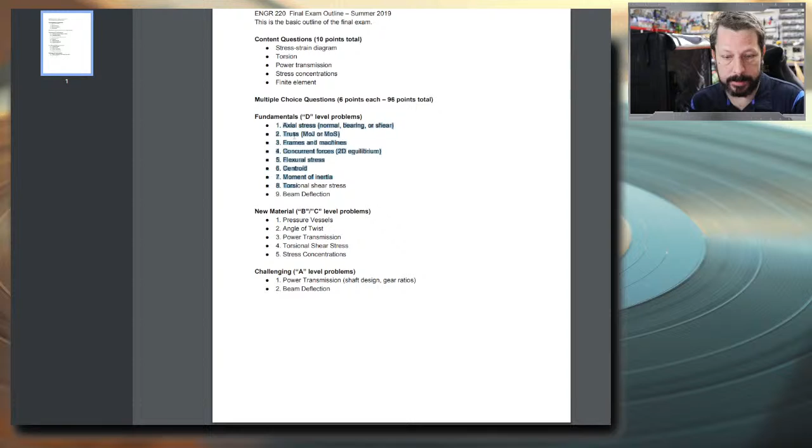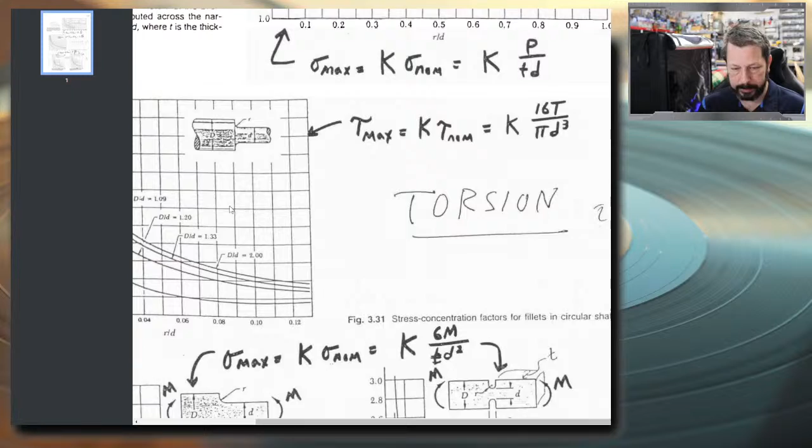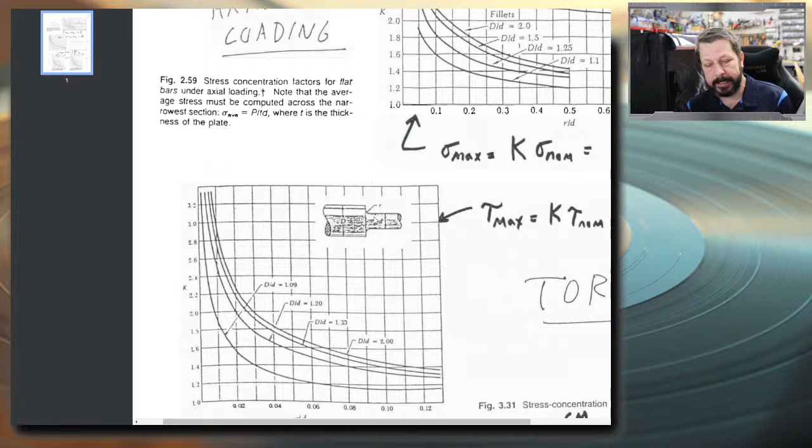Here's one - this is torsion, a shaft with a step on it. We talked about this before, where there's often a need for a shoulder on a shaft so a gear or bearing can ride against it, or maybe you just don't need the strength at that point any longer, so it's a smaller diameter. But there's a change in geometry. Anywhere there's a change in geometry like that, you'll have what's called a stress riser, meaning an increased amount of stress at that transition zone between the larger and smaller areas.

This chart is used to help calculate that increased stress. It's a multiplier - this value K on the y-axis is really small, but K is how much you would multiply the average stress by. In this case, TC over J, you would multiply it by some number ranging from apparently 1 to 3.2 on our graph. At this location where the geometry changes from big to little, there would be that many times the stress - that much greater.

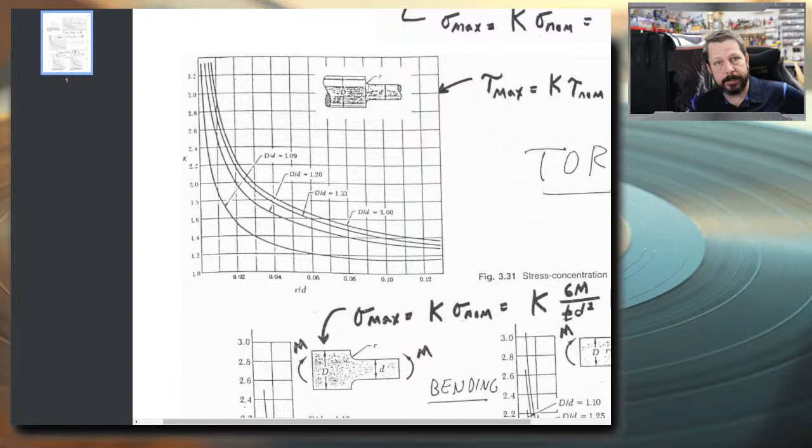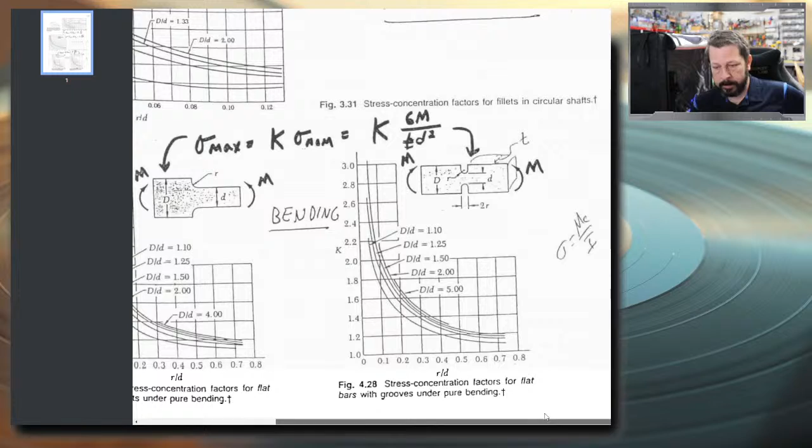Here we've got a flexural type, like a beam, with a change in geometry, big to little. Here's another beam type with moments on it, like a flexural stress, and it has a notch in it. Here's a flat plate with an axial load on it. This chart works for both a circular hole drilled in a plate, or a big-to-little change with an axial load. There are lots of these charts.

On your WebWork, I think you have 3 of these problems to work. The appropriate chart is just right there in the problem statement. These charts are on the exam references so you can see them. They're small, but at least on the digital version you can zoom in and see what's going on. But let's work out how they work.

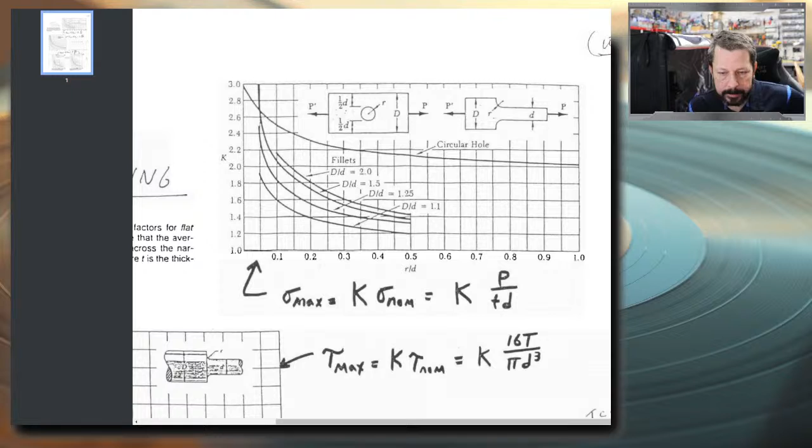Let's just use one of these. Actually, let's get a WebWork example. Here's one right here - it has the chart kind of crooked, but it's on there. So let's work through this and see how they work.

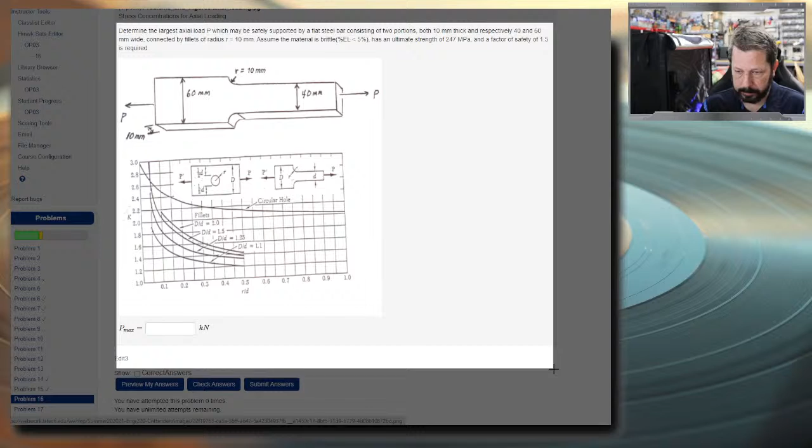Today should be a pretty short day.

Normally with this problem, we have an axial load P, which is what we're trying to find—the maximum value for P. It's safely supported by a flat steel bar with a large and small section. Both sections are 10 millimeters thick, 40 and 60 millimeters wide, connected by a fillet of radius 10 millimeters.

That's the radius of this little transition. How sharp is the transition? The sharper it is, so the smaller the radius, the worse the stress concentration will be. It'll create more stress.

Assume the material is brittle. Percent elongation—I don't know if we've used this symbol before, but it means percent elongation, basically a measure of strain, but in percent. It's less than 5 before it fractures, and it has an ultimate strength of 247 megapascals.

The brittle part here is about how a ductile material with a stress concentration will deform. You get a little higher stress where the stress riser is located, but that higher stress causes a ductile material to deform and absorb that energy, spreading it out. Brittle materials, not being able to deform much, can't do that—they just break. That's why this is talking about a brittle material.

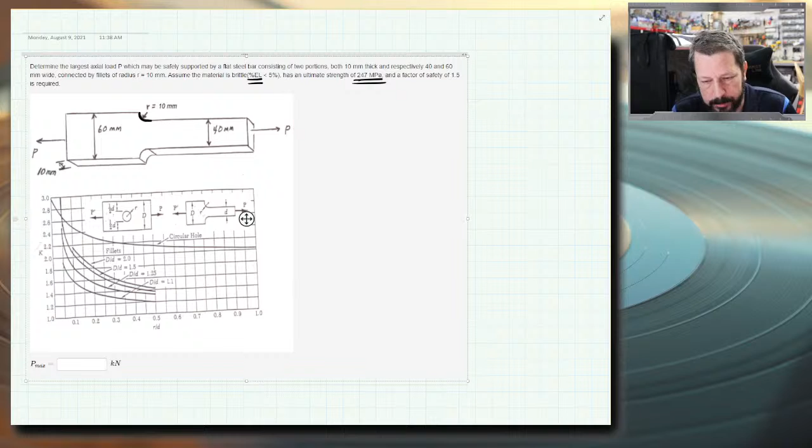We have an ultimate strength, sigma U, of 247. Again, for brittle materials the yield strength isn't very meaningful because it doesn't yield much before it breaks, so we use ultimate strength. A factor of safety of 1.5 is required, so our sigma allowable equals sigma U divided by our factor of safety: 247 times 10 to the 6th pascals divided by 1.5.

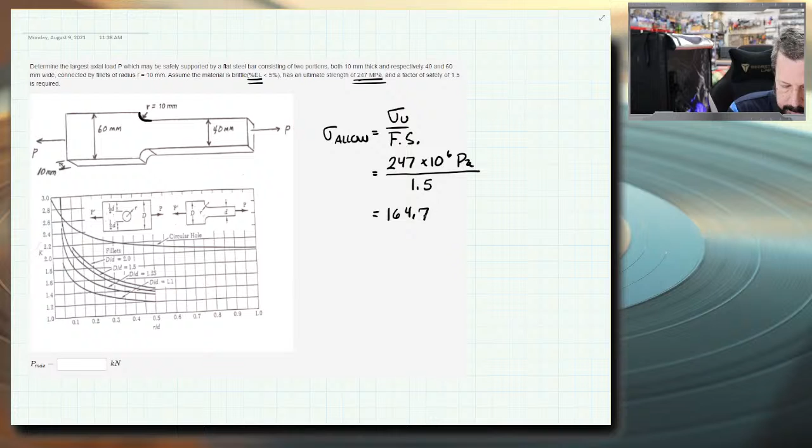Let's just do that math. 247 million divided by 1.5 is 164.7 megapascals, or 164.7 times 10 to the 6 pascals.

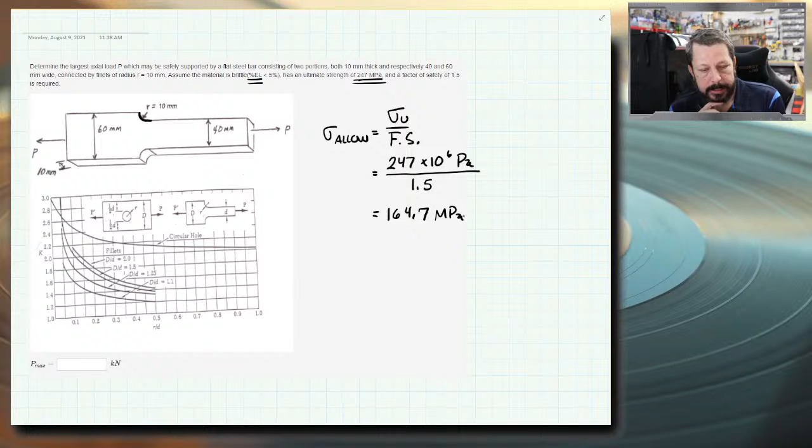Now I want to use the equations I already know. Sigma equals force, or P, divided by area. This is an axial force, so I'm calculating an axial stress.

I want to take the worst case scenario. There's a large section, 60 by 10 millimeters squared, and a smaller section, 40 by 10 millimeters squared. The smaller section will by default have a higher stress, so I'll calculate that stress—well, actually I'm calculating the force from that.

Let's hold off a bit because we still need to apply our stress concentration factor. This is the equation I want to work with, but we need to figure out what our multiplier K is going to be, based on this location where the stress riser is located.

On the chart, the top line is for if I had drilled a hole in the plate. I don't have a hole, so I don't use that line. But I have 4 lines all labeled capital D over lowercase d. Capital D is the width of the larger section, lowercase d is the width of the smaller section.

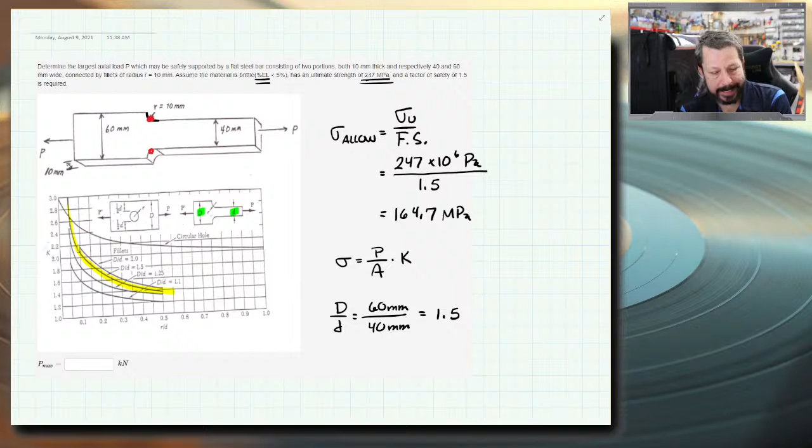Now I want to figure out my x-axis, which is the fillet radius over the width of the smaller section: R over d. Using the same units, 10 millimeters over 40 millimeters is 0.25. I have to make sure these are in the same units so they cancel out and I just get a ratio. So now I go to 0.25 on my chart, which is this line right here.

And I look for that intersection. I see that K for that trace at 0.25, for the ratio between the fillet and the smaller section's width, is 1.6.

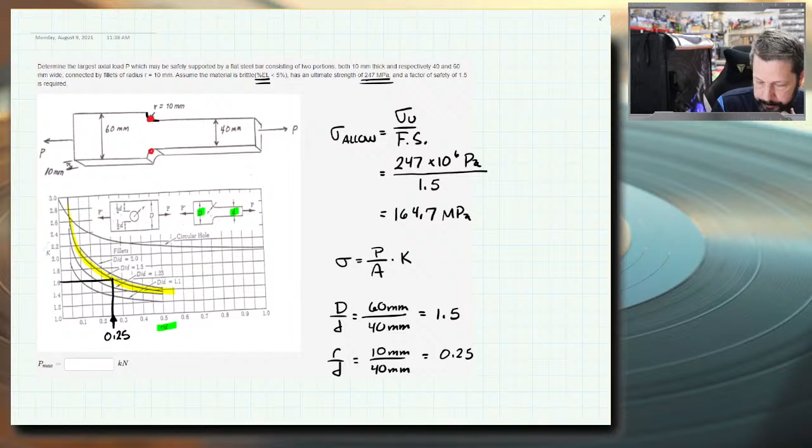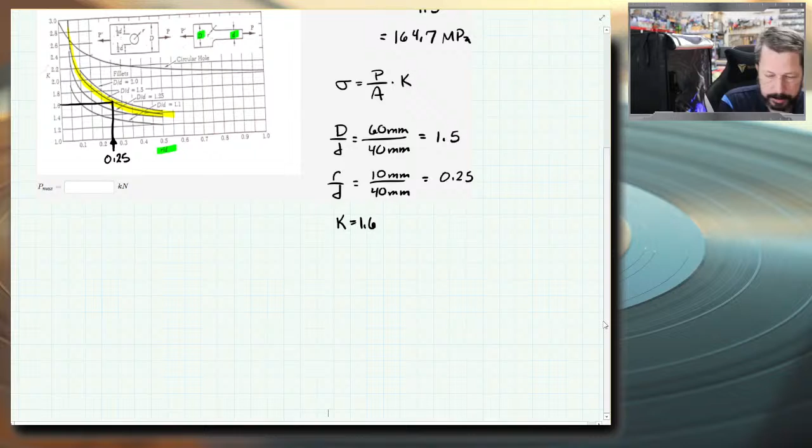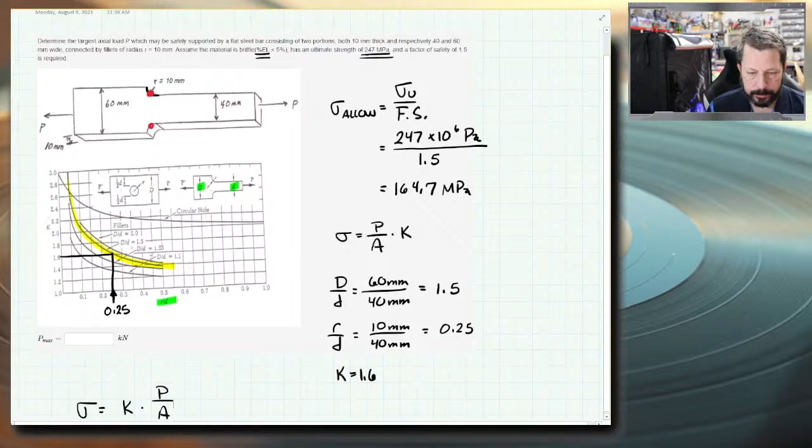Now I can carry on with my calculation. So sigma equals K times the internal force over the area. I didn't draw a free body diagram of the internal force, but if I were to cut this piece open and look at this piece of it, I have P, and the internal force must also be P. So that's the internal force.

Let's fill in the things I know. Sigma is, I have an allowable amount of stress, 164.7 million pascals, equals my stress concentration factor, 1.6, times P, that's the thing I'm actually trying to solve for, over A, which is the area where the force P is located. So that is 40 millimeters by 10 millimeters.

And I will need to convert that over to meters, just so I end up with meters being able to cancel out everywhere in my equation. The pascals on the left-hand side are newtons per meter squared. So 1 meter is 1,000 millimeters, and I have 2 of those, so I need to square that conversion factor. 40 times 10 divided by 1,000 squared, times 1.6.

So I have a coefficient with P now. I need to divide: 164,700,000 divided by that factor will give me a value for P, which is the maximum force that I can apply before I exceed this factor of safety.

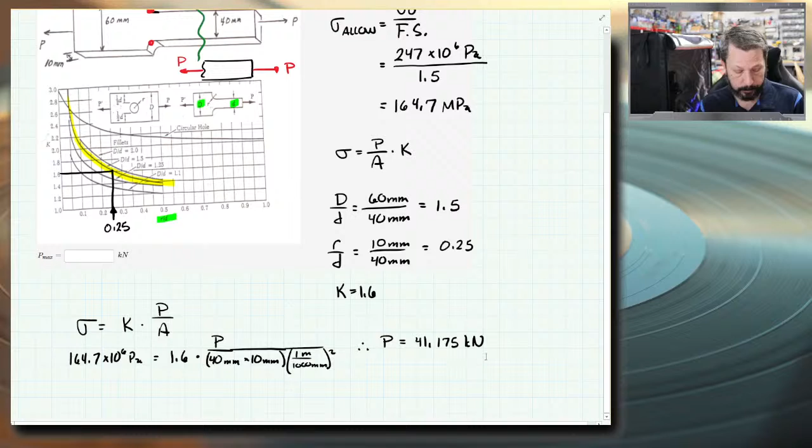Oh, gotta log in. And it does—slightly different number, 41.166. Well, also this number right here, when I applied the factor of safety, it did have a repeating 6 that I just rounded to 0.7. So there is some rounding in that number.

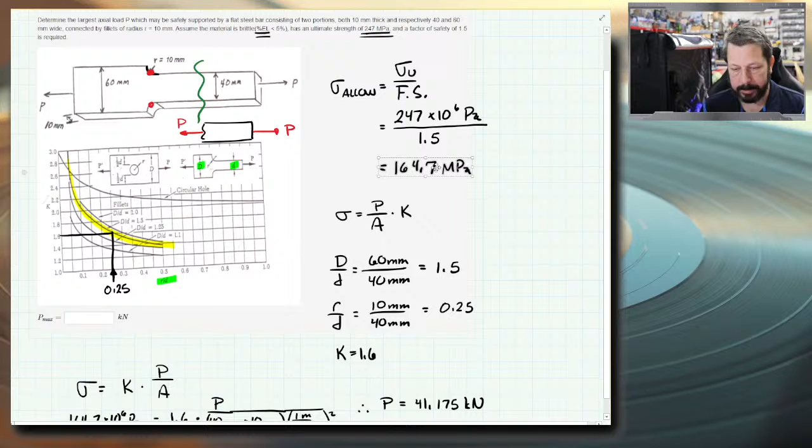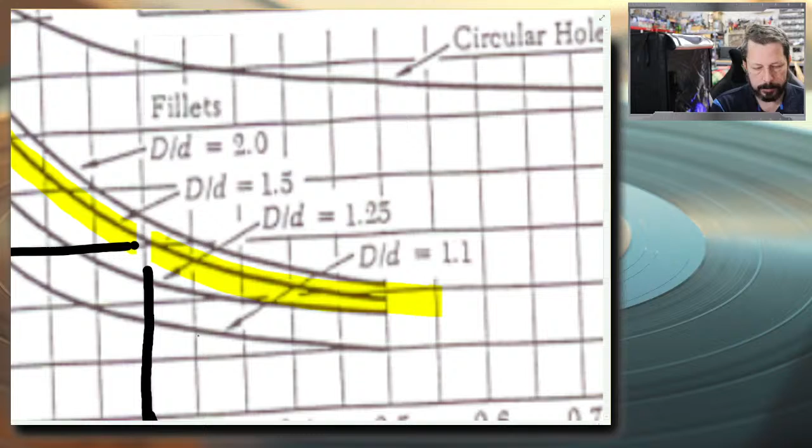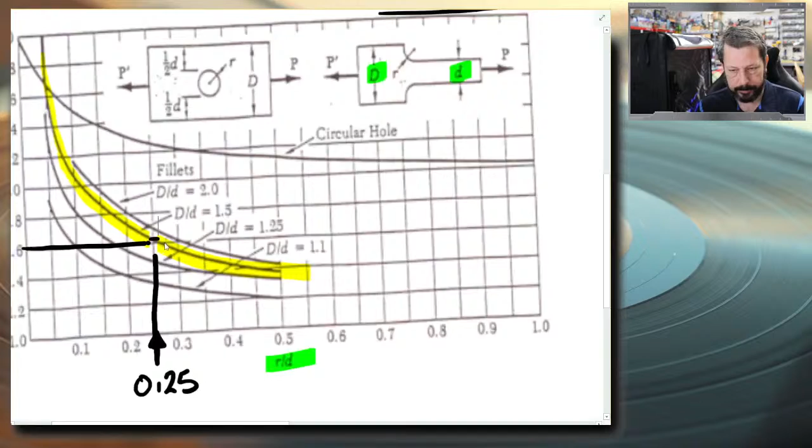These others, and there's a slight amount—if we really zoomed in on this and look at it, K probably is a little bit more than 1.6. It's like 1.61 maybe, or something like that. So there could be a little bit more that I am kind of rounding on the value of K.

All right, so that's kind of how that works. You calculate stress just like you normally would, and then you use the geometry listed on the chart to figure out what trace to use, what your x-axis value is. There's some ratio of the transition fillet—usually it's a fillet, though sometimes the hole doesn't necessarily have a fillet, but it's the radius of the hole, to some dimension on this smaller piece. That'll give you a value for K, and then you multiply the stress you would normally calculate, the average stress, by K, and you end up with your increased stress.

So we should be able to take this same geometry, put it into SolidWorks, and get somewhere near the same thing, although I don't know what steel I can put in there that's going to be brittle, so we may not get quite the same thing. It's going to give us a little bit different numbers, but let's just see how we would do this in SolidWorks just to get that done.

And we'll create this part. It doesn't give us, I don't think, our dimensions here. Yeah, they don't give us any lengths, so we'll just have to create some reasonable lengths. But just as a way to calculate this thing, let's do it in a front plane. So we'll do something like that, and that, like that. Now let's put some dimensions on there to make this match up.

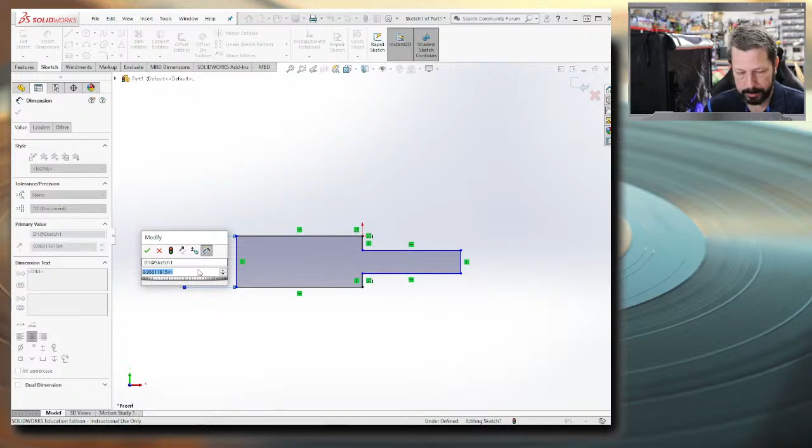So this is in inches, but this was 60 millimeters. This one was 40 millimeters. That would make this dimension.

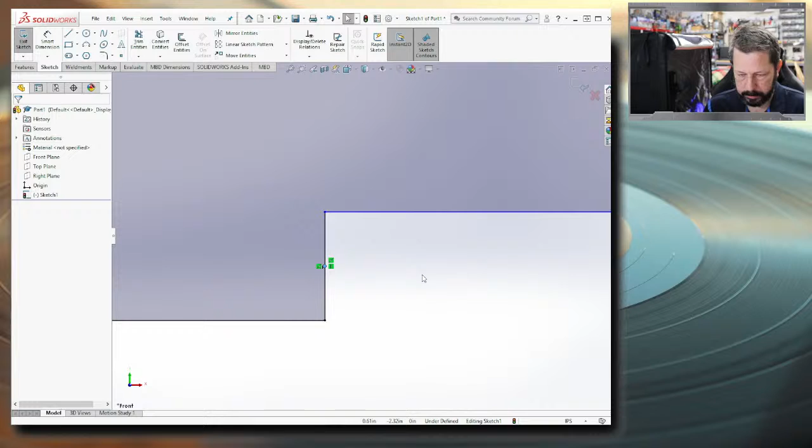Did it click? I was trying to dimension a point. That line—I want to dimension that line. It won't really let me. There we go. What is this, 10 millimeters?

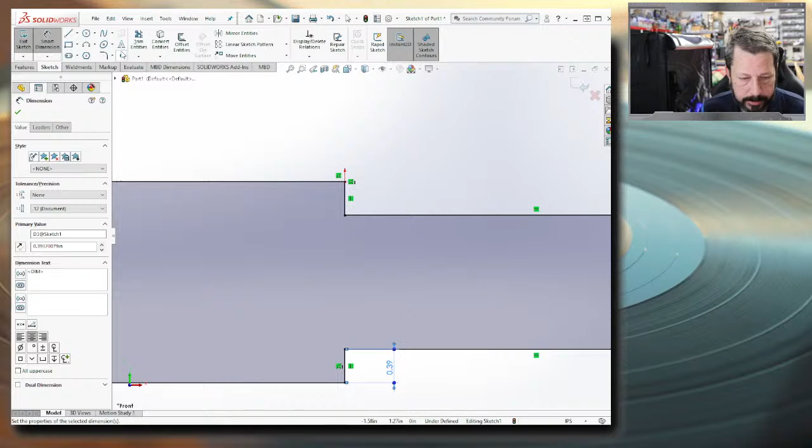These dimensions on the length aren't going to matter too much, so I'm just going to leave them the way they are. We have a fillet here on this location and this location. They have a radius of 10 millimeters.

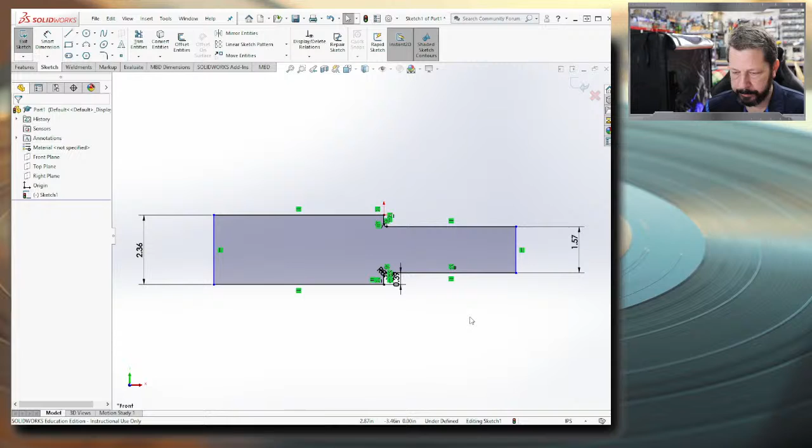So that's what it looks like in real life, or at least to scale. And we can extrude that. It said 10 millimeters thick. So we can extrude that 10 millimeters. And there's the thing that we're actually trying to calculate with.

Let's get our simulation open here so that we can run a little simulation on it.

While we're waiting on this, since we're talking about finite element also here, these are both ways to get a better answer than what you would have if you just did the axial stress in the thin part of the bar without considering the stress riser at the fillet. We've done some SolidWorks, some finite element analysis in the past.

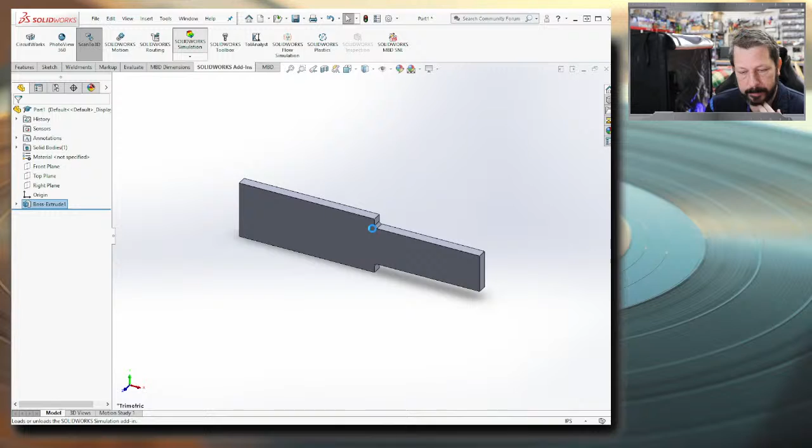Just to explain some of the terms in there, the thing that's going to happen is we're going to apply a mesh. And the mesh is instead of looking at this as one big piece of metal, we look at it as lots of little elements. They're called elements, finite element, that create this same shape. And by doing that, we can look at individual responses of elements to kind of create a bigger picture of what's going on in the whole item.

It's kind of like, instead of looking at a wall, you look at individual bricks in the wall and how is each one of those bricks responding. Each brick is interfacing with its neighbors and influencing them, and they're being influenced by its neighbors. So it's kind of like that.

Let's see, we've got our simulation. Yeah, there it is, new study. We will do a static study. No sense in doing any transient stuff.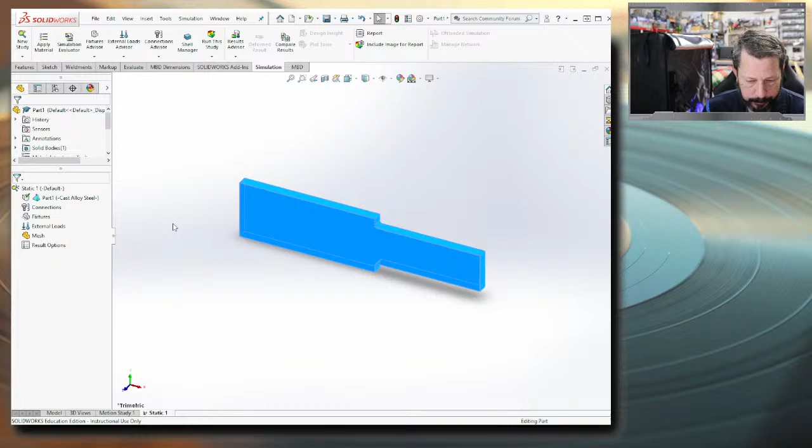Let's apply a material. There's a cast steel that will have some amount of brittleness to it. We just use that. Fixtures, we will fix one side.

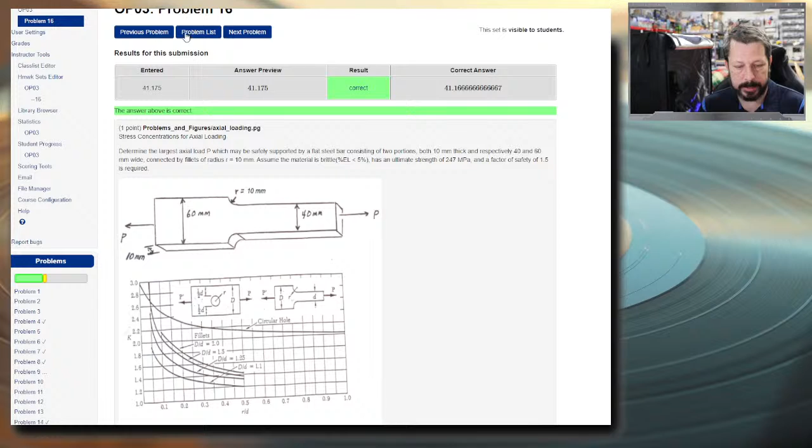So in our WebWork picture, it just showed forces, axial forces on either end. We'll replace one of these forces with a fixed surface. So like this force is the reaction to this being attached to something. So we will just pick this surface and fix it totally.

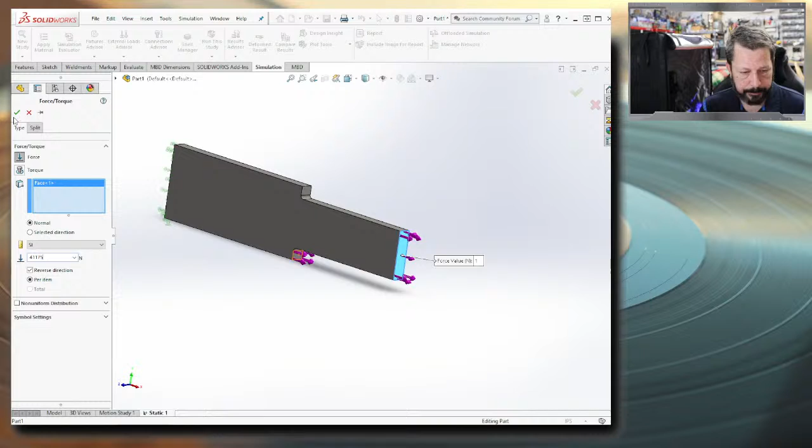And over here, we will apply a force on this surface, but we want a tensile force, so let's reverse the direction, and let's make this force -- oh no, we actually do want SI units. Let's make this force the, what was it, 41,175 newtons. And there's newtons. Okay, so we're doing this one backwards from the way that we did the web work problem.

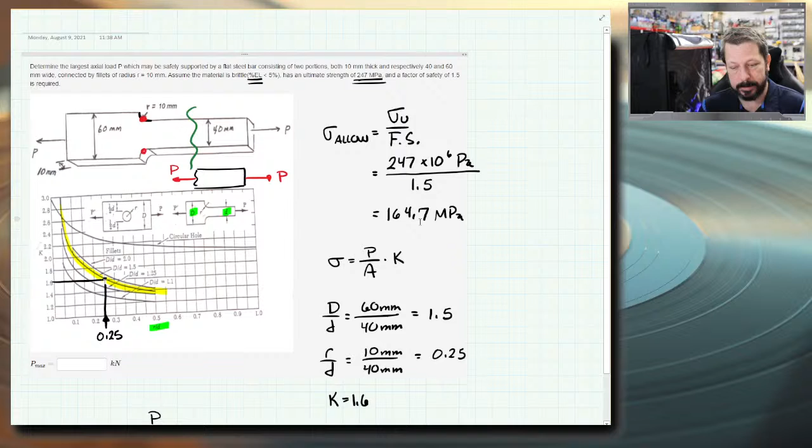The web work problem wanted us to find the force that we could apply. This one, we're applying that force and seeing if we get the same kind of stress. So the stress that we're looking for is, well, let's see, it's going to be on here, 165 megapascals at the little corners here. Let's mesh and run.

This shouldn't be complicated there. It's already done. Now I did get a very different number here. But let's see if I can -- so I got 2.264 times 10 to the 8th, where I shouldn't have more than 2.5 times 10 to the 8th. Well, no, 1.6 times 10 to the 8th after we apply our factor of safety.

The difference here is the fact that, let's see if we can see it -- see how this material was able to deform? The brittle material would have trouble doing that. Now this is multiplied 200 times, so it didn't deform that much, but when you exaggerate it, you can kind of see what it wants to do.

It did predict that the high stress is in that location where we thought it would be. It predicted a much higher stress for this amount of force, but if I hover over here, you can see the amount of deformation, again, 200 times what it really is.

But you can kind of see how a more ductile material is going to flow and naturally reduce the effect of these stress risers. Because there's the original outline, and here's where we are over here. So there is a lot of give that is happening in a ductile material.

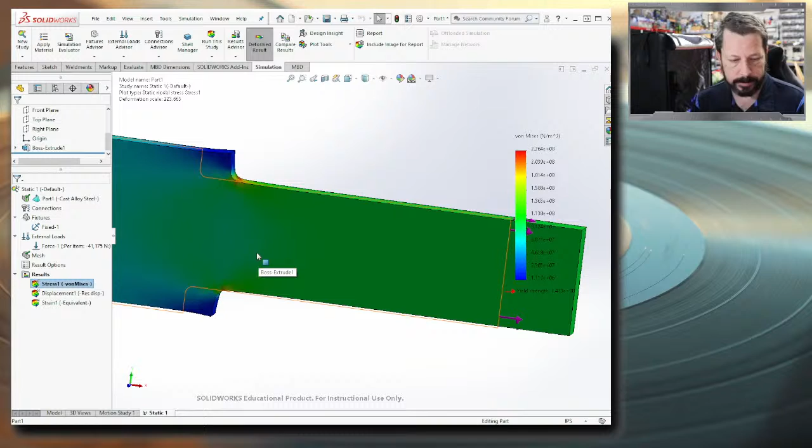I don't really even have one listed here, I wonder how long it's going to take to open this up. Sometimes opening this window takes a really long time. We'll give it a second and see if it can apply a material that maybe like a cast iron or something. It blinked, but I don't see my window. There it is, all right.

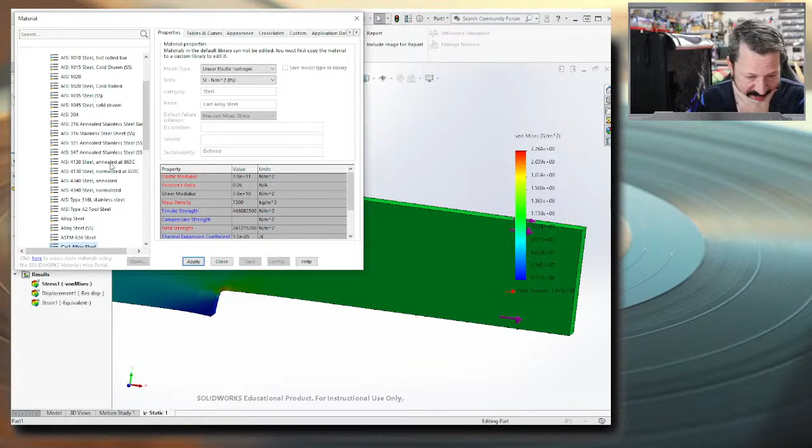These are all steels, there's an iron. Gray cast iron is not going to be very ductile. So let's see what we get when we run that one. In fact, it shows that all of the results are not valid anymore.

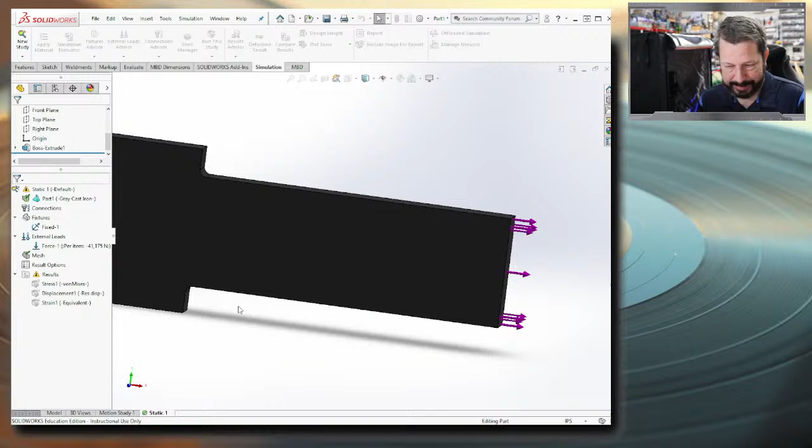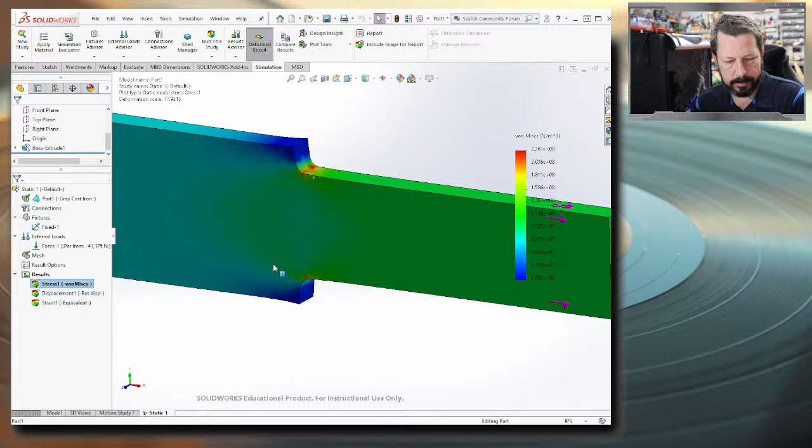Well, I still get, still trying to show some ductility here, even with less. Let's see, where's my original shape? Still showing a lot of ductility in that that I don't think should be there, but this is also why some of your simulations aren't always perfect.

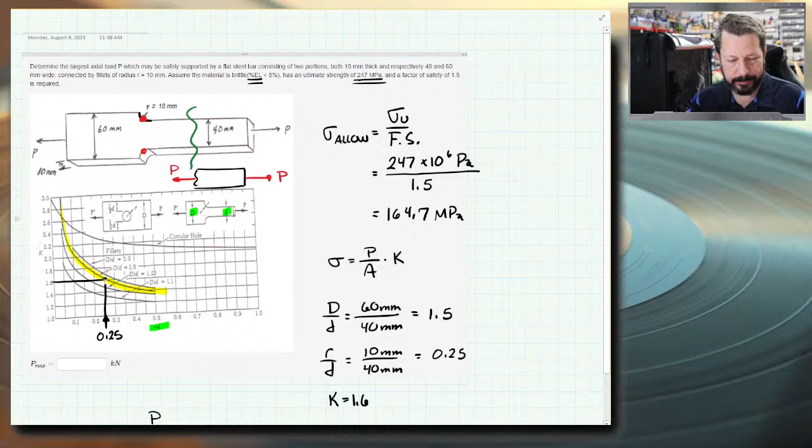And I'm getting a much different number over here. Well, not much. 2.2, 2.3, and I should have 1.6. So they're not orders of magnitude different, but there is a difference. So you can't trust completely either one of these methods. But there is a by hand way to get a better estimate of the stress. The stress that we would have calculated is way below all of these.

And then there's the other thing with this finite element, see how it's really blocky in here? Typically finite element will give you the very maximum stress, and it's going to be a very, very localized thing, like at some one individual little point somewhere. So if I look and see, the color in here is actually more like an orange. If I average it all together, I can get a better average if I increase the mesh. In fact, maybe I'll do that in a second. And not look at just the peak over here.

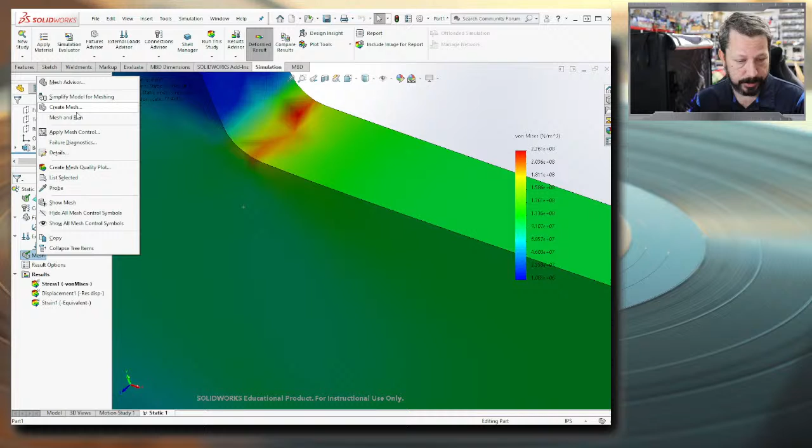And the oranges are, now I'm in the 1.8s or so, maybe a 2. So I'm getting closer to the thing. Let's increase our mesh. Let's do the mesh advisor. That'll just let me move the slider over and I can get a little more. Oh no, that's this thing. Never mind, let's not do the mesh advisor.

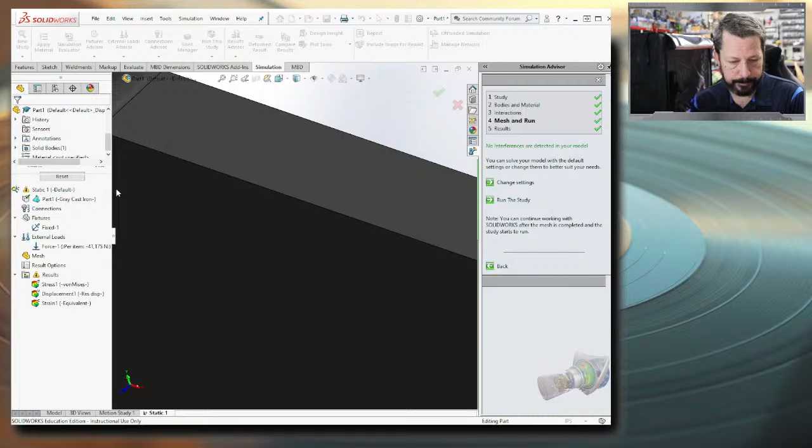Maybe it's create mesh. There we go. We will move it a little bit over here to the fine side. You can actually see, yeah, it shows up a little bit. You can see, it's kind of hard to see, but because it's a dark blue on a dark gray, you can see the elements in there.

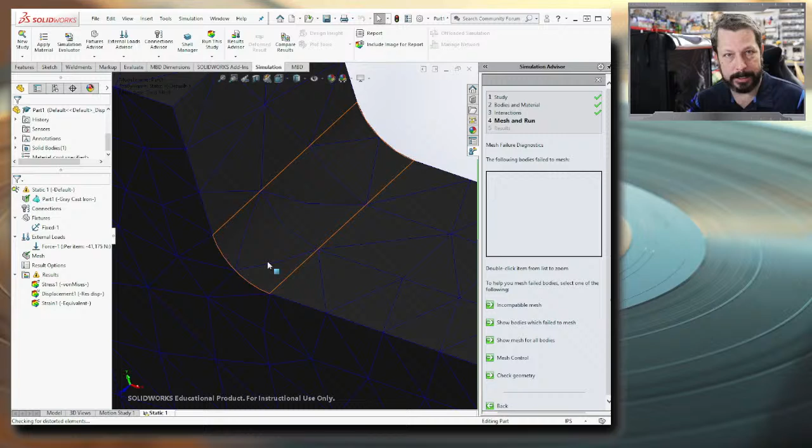There are not a lot of elements in this location where I'm trying to calculate this stress. And so when you're doing something like this, a better simulation version, so SolidWorks or ANSYS or anything like that, is going to be to increase the number of mesh elements in the particular location that you're interested in. So we have apply mesh control, and I could select this entity over here and see it's given me these little, I don't know, nodes where it's going to increase the density of them.

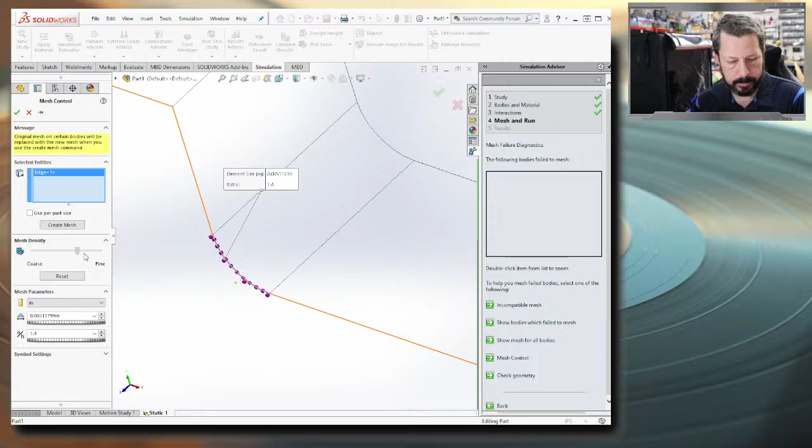Or I can just specify, let's see, I want them, this was a 10 millimeter radius. Let's say that I want them spaced out every half millimeter. So now we need to, I think that should do it. Let's see if we can create mesh with that. Oh no, that's not mesh. I just want to mesh the thing.

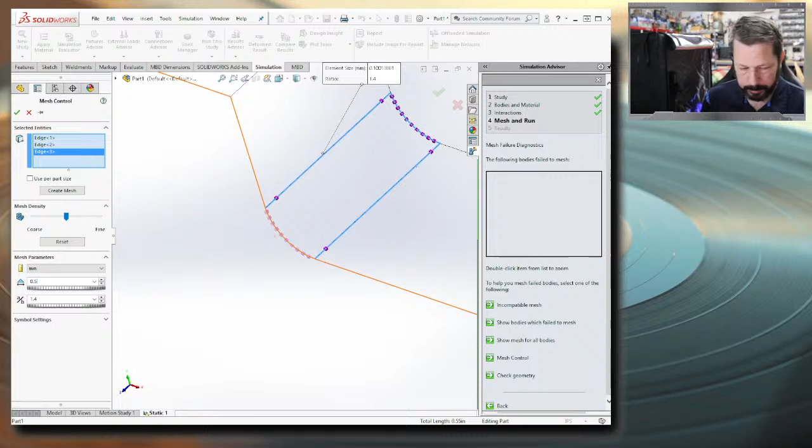So, well, so it kind of helped. See what it did? It put the elements right here, but then they still ended up kind of spreading back out. So let's add a few more mesh controls, and let's add them to this line, and this line, all of them on the, what I did, half millimeter spacing. And let's see if we can get a little bit more detail. I might have to do some different ones on these lines, but let's see.

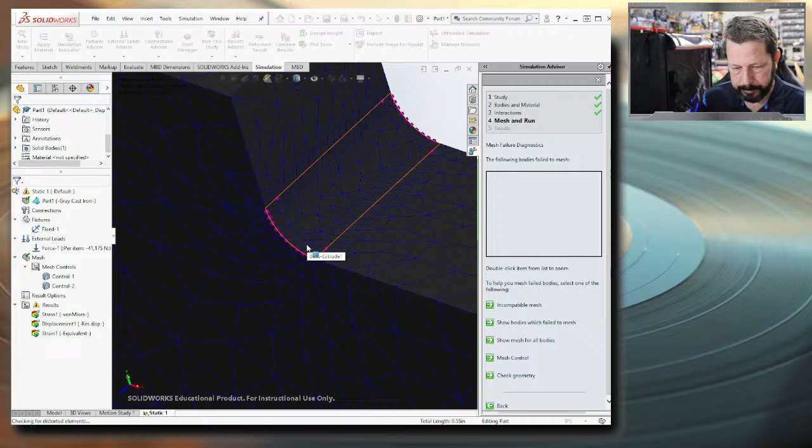See what we get. So it's starting to put in more and more detail in there. It's still not as much as I would like in there. I would need to create a little bit more control in there, but let's just quit fiddling with it and run the thing. I guess I could have just run it, I don't need to remesh it. It's taking a little bit longer to run.

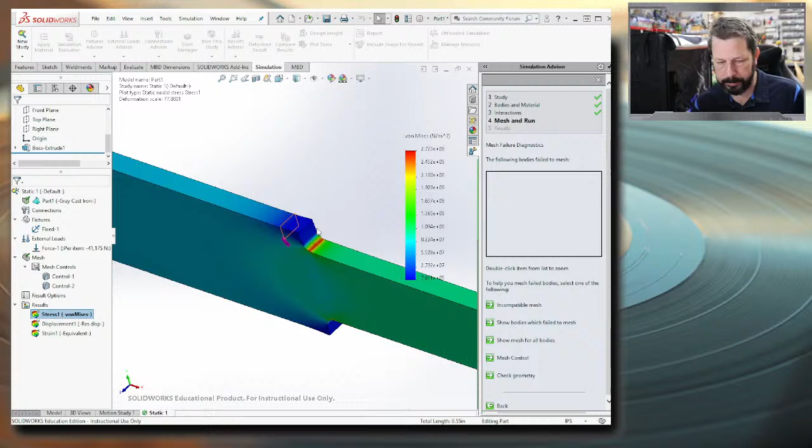And now when I look at, well, let's look at our stress again. I have a much better resolution on the stress that's in here. I still have that higher number, so there is still a prediction that the stress is going to be higher than what I calculate when I use the chart here, but at least I have a better sense of what's going on there.

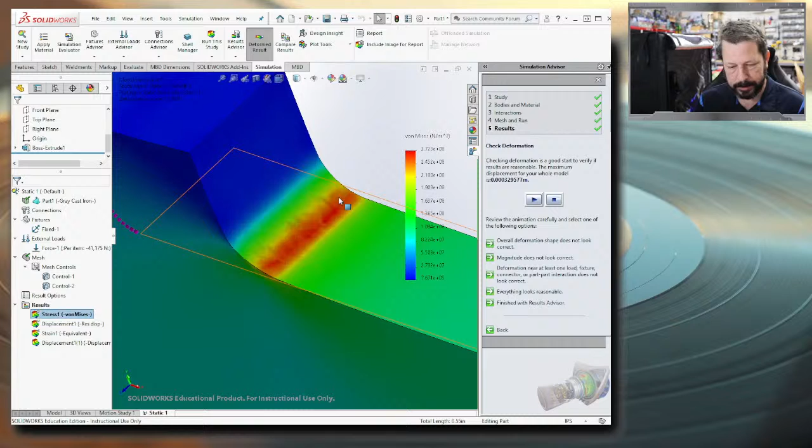And what color is that? Maybe the 2.5 color somewhere in there. I could probe it and actually ask what is the stress at these different locations, but that's getting a little beyond what our goal is here.

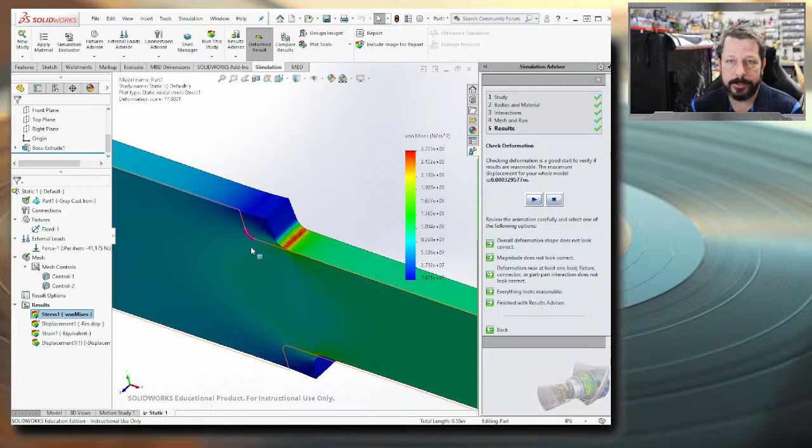You're not going to have to do a SolidWorks simulation on exam 3, but you might have to answer questions like when you're doing finite element analysis, you create a mesh. You apply constraints to hold the mesh in space. You can apply external loads, forces, pressures, and all sorts of different things. The mesh is made of elements, and elements are connected at vertices. Things like that might be types of questions you'd have to respond to.

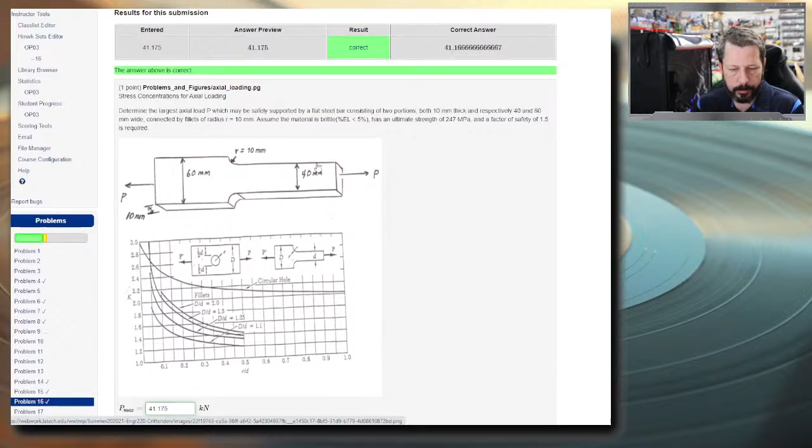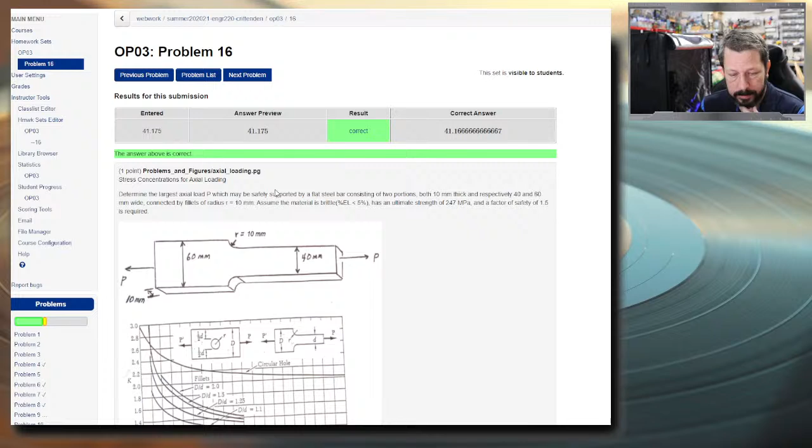All right, I think we're good with SolidWorks. We're going to close that down, we don't need to save that either. Why don't we do one more of these just to have one more under our belt? And I think that's going to be it, the last topic we need to cover for our entire quarter. Got some tests to take, but that should do it for us. All right, let's do this one.

Okay, copy that, and we'll put it over here.

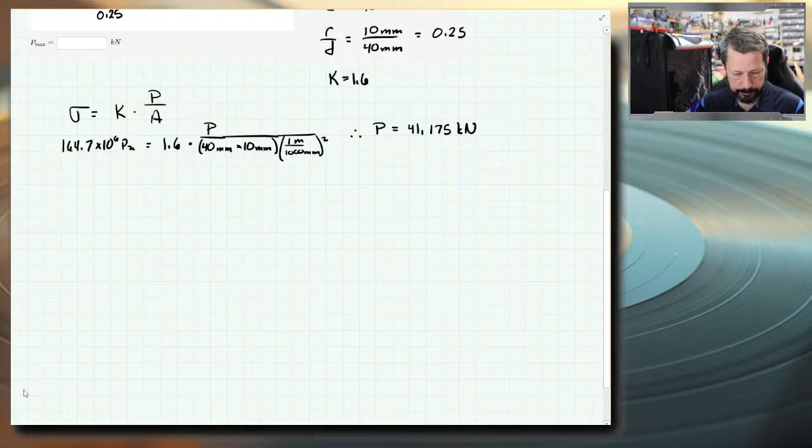This one's a flexural stress. We have a beam. Just to clarify, on the exam, these WebWork problems give you the chart right there with it, but on the exam you won't necessarily have the chart in the problem statement. You might have to figure out which chart to use. The charts are all in the exam references, but it won't necessarily be right there in the problem statement, so don't count on that. You do need to know which one of these charts applies to which situation.

All right, so we have a beam, 180 newtons. These grooves cut into one end are 10 millimeters deep, and they are 1 meter from the load, labeled here as 1 meter. Determine the smallest allowable width - basically, the dimension shown is the radius of the groove. So how big is that radius? Smallest allowable width of the grooves if the allowable stress in the bar is 150 megapascals. The smallest allowable width?

Well, that seems to... all right. We want to find out the width of the groove - seems like it should be the largest allowable, but whatever. We're going to neglect the effect of shear stress due to bending. Whenever you do have bending, there is a shear stress, a direct and a secondary shear stress, but we're ignoring those. All right, here's our little chart, and we can get started with calculating some things.

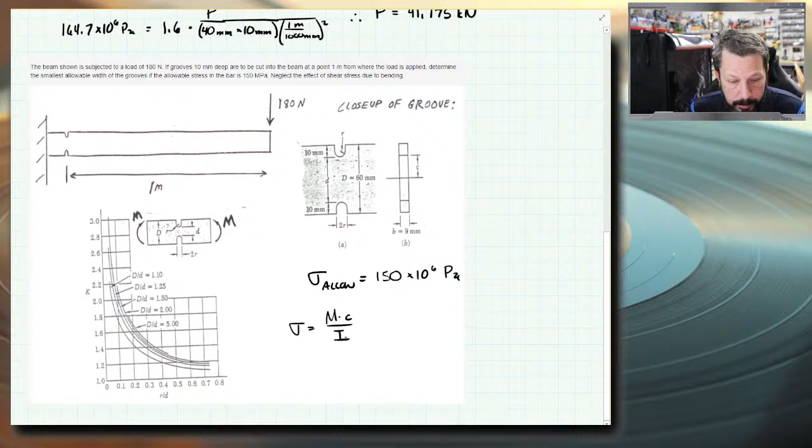All right, this is a flexural stress. Sigma equals MC over I would be a flexural stress equation for a beam. The moment created at the little notches is this 180 newton force times 1 meter, so we can deal with that. Moment equals 180 newtons times 1 meter, 180 newton meters. That's the bending moment if we were to cut this thing open right here and solve for the internal bending moment.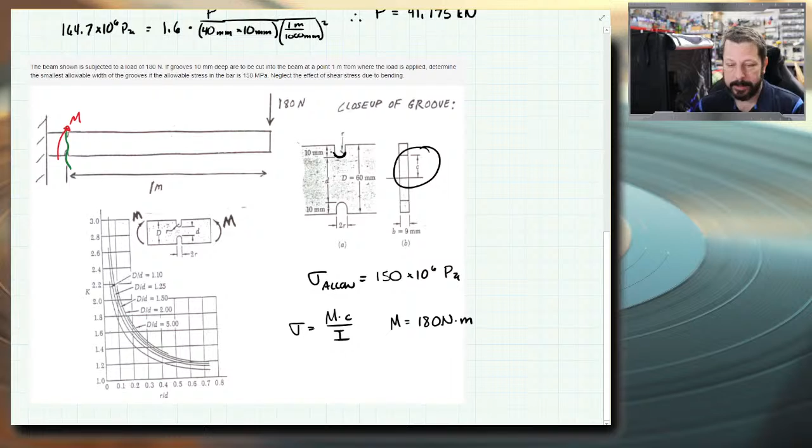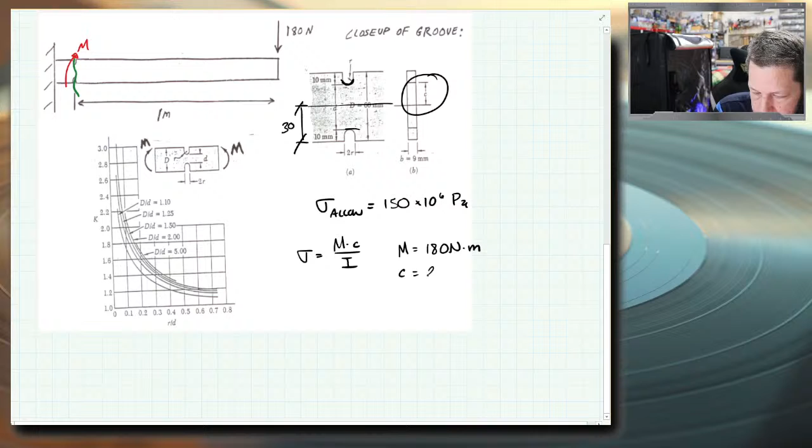C is the distance from the neutral axis - it's labeled right here, in fact. The distance of the neutral axis to the point of interest. The point of interest is going to be the bottom of the little groove here, and they just show us what C is. C is 20 millimeters, it looks like. Let me see how this is - yeah, the 10 millimeters is to the very bottom of the groove into the bar, and this distance, whoa, that's getting crazy on me, is 30 millimeters. Take off 10, so we're left with 20. So C is 20 millimeters.

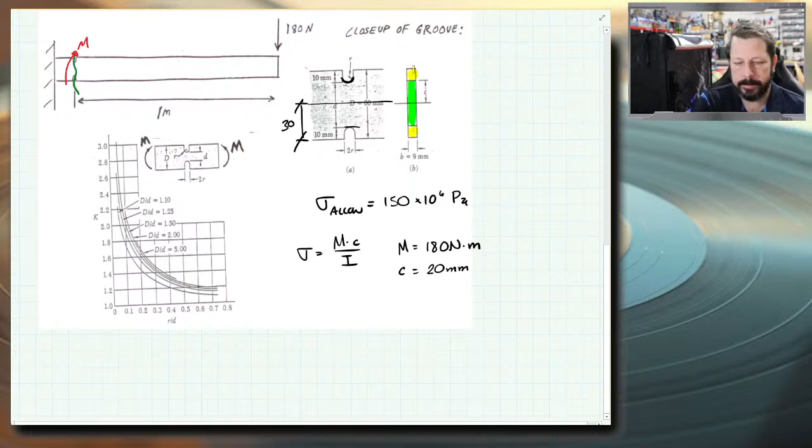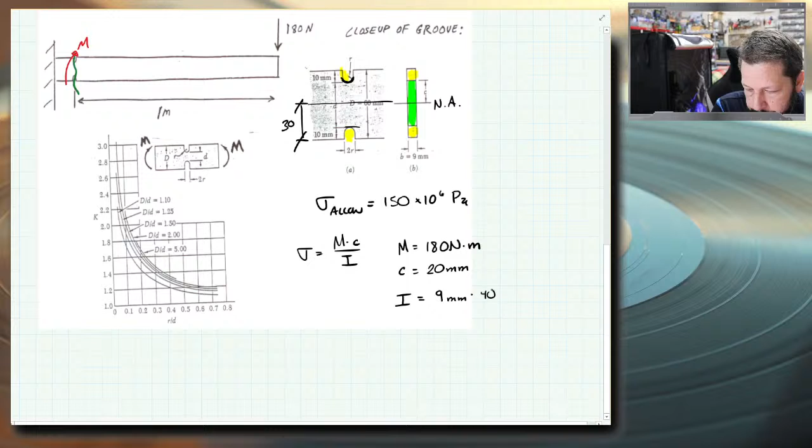I is the moment of inertia for the beam. This little picture is a cross section of the beam, it's just a flat beam. These little parts here and here are showing the inside of the groove. So the I that we need is the moment of inertia of this green rectangle about its own neutral axis, the neutral axis being that axis right there. We don't even have to calculate it because it's symmetric. So I is the moment of inertia of a rectangle where there's a base of 9 millimeters times BH cubed. H is 40 millimeters. BH cubed over 12, and we need to calculate that number.

So let's see, calculator went off. 40 cubed times 9 divided by 12, but that's in millimeters to the fourth. So 48,000 millimeters to the fourth power. Okay.

MC and I, all right. We need to figure out what our multiplier is. We have everything except, basically, what are we trying to solve for? Oh yeah, we're trying to solve for the radius of the thing, which is going to be on our chart over here. That's an interesting one, I've got to think about how we're going to do this.

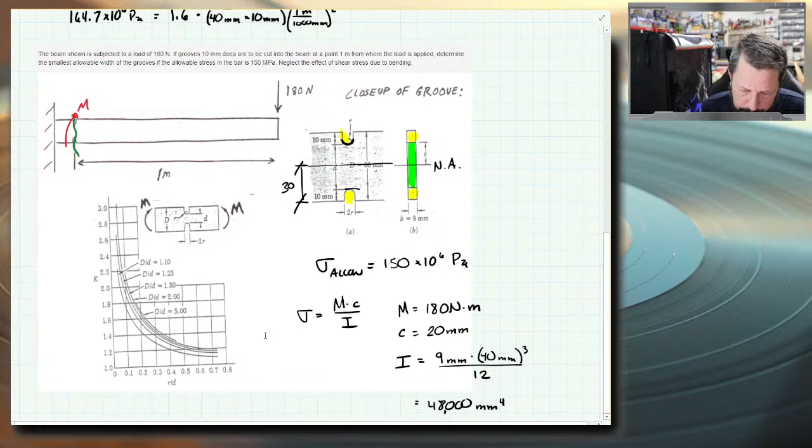Let's see which chart trace we're on. D over D is 60, and lowercase d is 40. So 6 divided by 4 is 1.5. So we're on the 1.5 track.

And I think what we need to do is solve for K first, and then we'll back out from there. So sigma allowable is 150 times 10 to the 6th megapascals equals K, which we don't know, times M is 180 Newton meters, C is 20 millimeters times 1 meter is 1,000 millimeters over...

Okay, let's see what we can do here. 48,000 divided by 1,000 to the 4th, with its conversion factor. 180 times 20 divided by 1,000 divided by my denominator. All right, to get a big number, let's see, that's 75 million. So 150 times 10 to the 6th megapascals equals K times 75 times 10 to the 6th megapascals, would be those units also, I think.

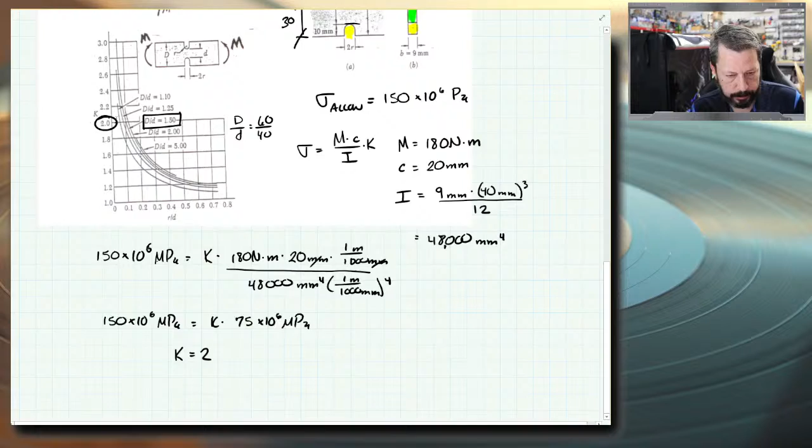Should be. So 150 divided by 75 is 2. So K equals 2. So we go to K equals 2, intersect that with our line, which, let's zoom in a little bit on that. So that's this point right here. And let's go down here.

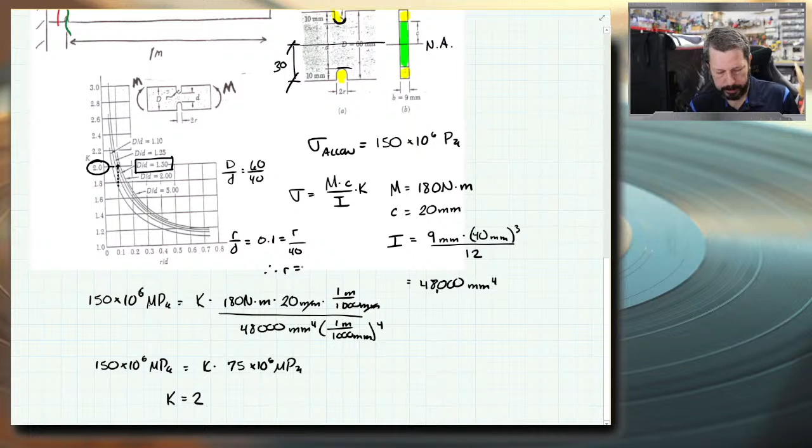That is a R over D ratio of 0.1. So R over D equals 0.1 equals R, which we don't know, over lowercase d, which is 40. Therefore, R equals 0.1 times 40, which is 4. And this is millimeters here, so R is 4 millimeters.

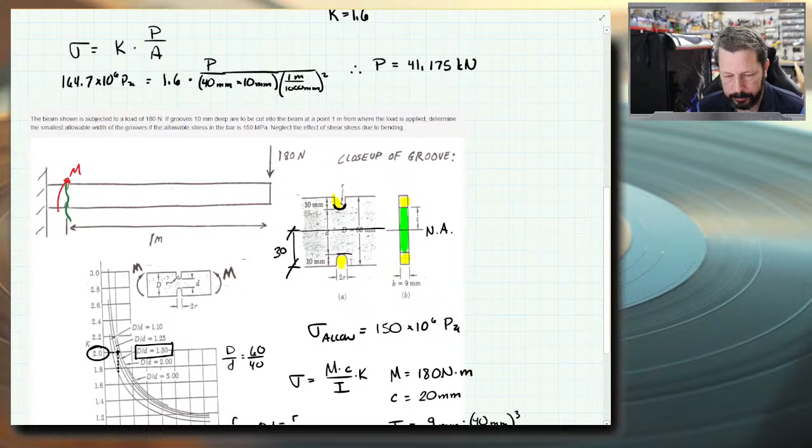The question is, determine the smallest allowable width of the groove. If we look at the groove width, it's actually 2R, so looks like it's going to be 8 millimeters. Let's see, well, and it even says over here 2R equals 8 millimeters. And we are correct—maybe the only one we ever got exactly correct, the last one we worked.

So that one's a little bit more complicated. You've got to figure out that you can even do this direction, where you solve for K and then figure out what some of these ratios must have been if you know the value for K. So that's a little bit different way of going about doing it. This is more of a design problem where we're designing a feature on this bar, versus the others, which are typically more analysis problems. We've got the bar all well defined and we're trying to analyze either a stress at a location or how much force it can hold or something like that. So this is a little bit more of a design problem.

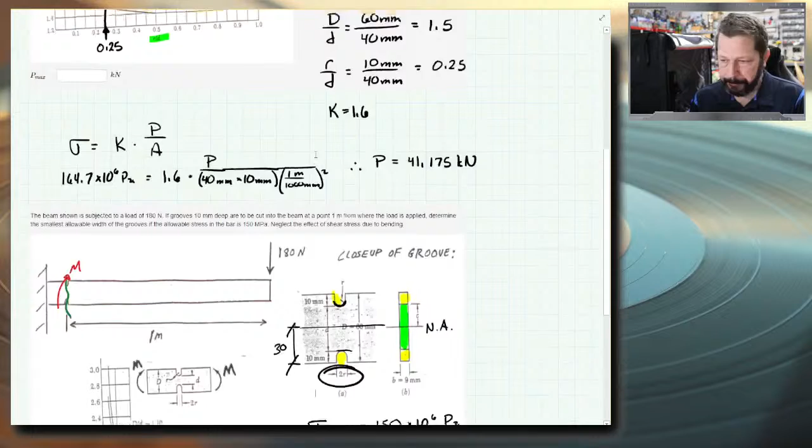All right, I think that is going to give us a good setup. There will be—let me check that before I tell you that for sure. Did I put a stress concentration problem? I know there's some on web work. Yeah, there's one of these problems at the medium level kind of problem on the exam. So there's one to work on.